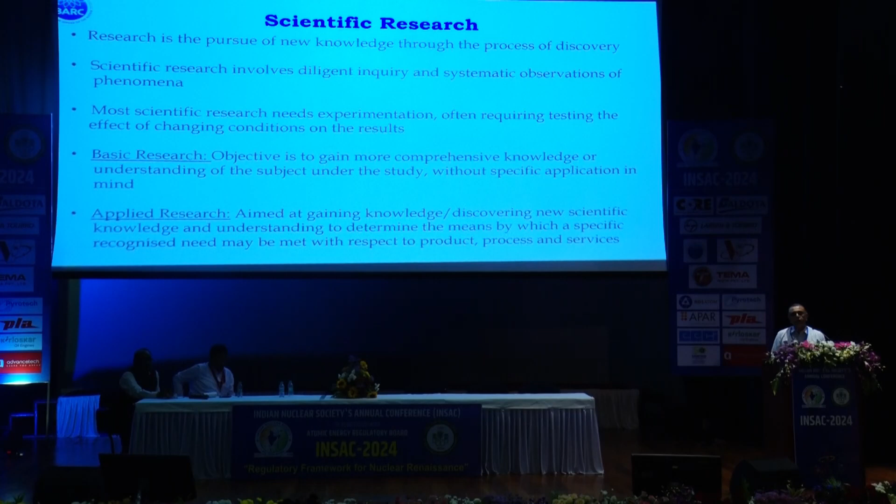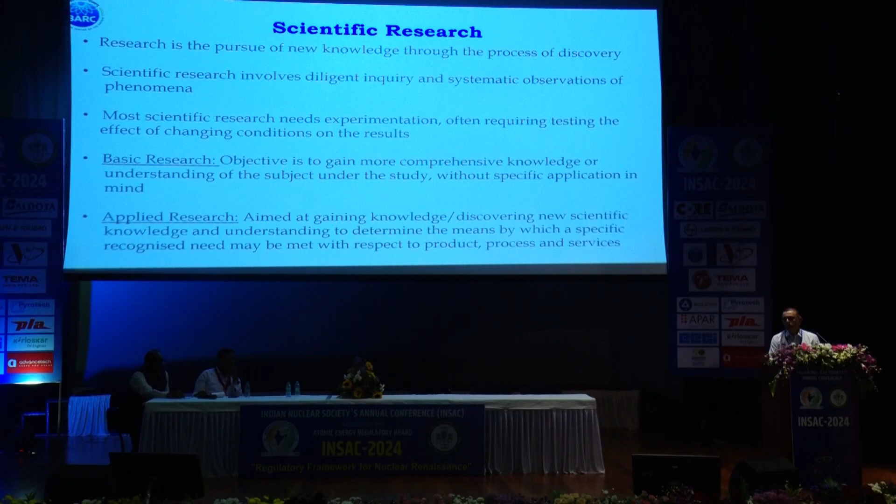Let me start with the basic definition of research, which is the purpose of generating new knowledge through the process of discovery. Scientific research involves diligent inquiry and systematic observation of phenomena. Most scientific research needs experimentation, often testing the effect of changing conditions on the results. And we see that there are two categories of research: one is basic research, and another is applied research.

The objective of basic research is to gain more comprehensive knowledge or understanding of the subject under study without specific applications in mind. For example, the study of spray. Basic researchers study spray with varied droplet sizes, interactions, etc. But applied research is very much industry oriented. The spray in a car wash or the spray in a nuclear containment would be entirely different; the characteristics would be entirely different. So with respect to the industry pursuit, the research gets oriented.

Now, in our nuclear domain, safety research is carried out between three agencies: the utilities, the regulator, and the research institutes. The primary objective of the utilities is to carry out research to meet the design requirements as per the regulatory guidelines. Whereas the regulators carry out research to set or review the design acceptance criteria, or set up new criteria so that the utility can meet those criteria.

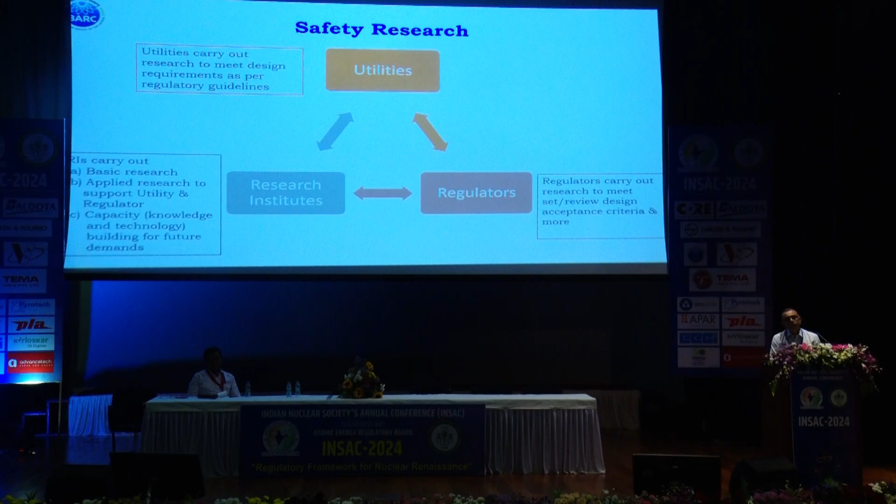Now the research institutes work on feedback either from the utility or from the regulator. Sometimes the utility requires some particular research to be carried out in the research institutes, or the regulator wants some research carried out there. So the research institutes carry out, first, basic research; then applied research to support either the utility or regulator or both; and third, capacity building, that is knowledge and technology building for future demands, since new research demands keep coming.

Particularly to focus here, why is regulatory research required? The research aims to close the identified gap areas in different fields of nuclear safety for fresh designs and aging plants. It aims to reduce the order of uncertainty in the selected safety and acceptance criteria, and to quantify the acceptance criteria rather than keep the criteria subjective.

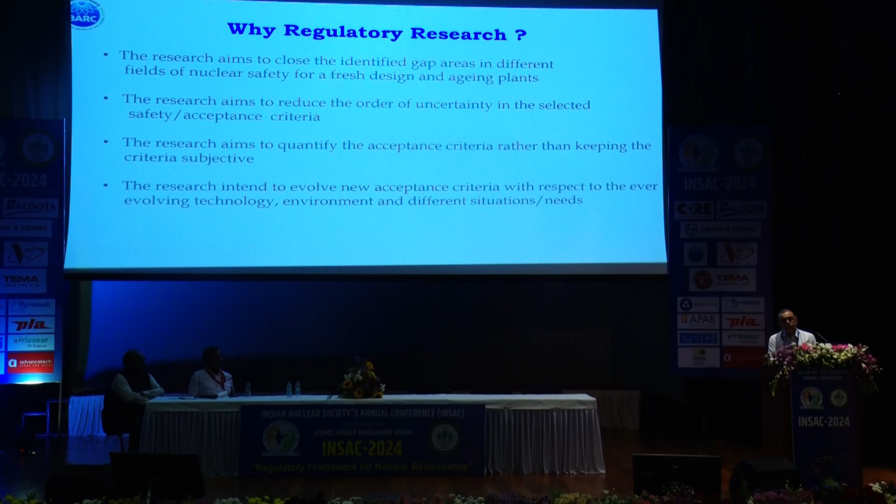In many places you will find the criteria are given subjectively, but a dispute comes whenever the criteria are put as a subjective matter. Then the research intends to evolve new acceptance criteria with respect to ever-evolving technology, environment, and different situational needs. As environment and situations change over time, there's always a need to update the acceptance criteria.

Now, I will show you some glimpses of safety research in regulatory decision making. The support given to the designers as well as the regulator over decades by the Reactor Design and Development Group is enormous. So I will just touch upon a few activities that helped the designers as well as the regulator in decision making.

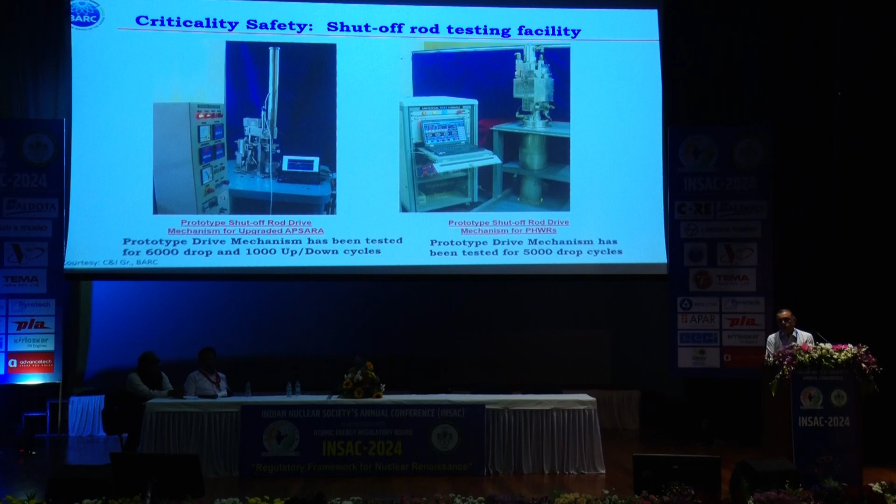This is with respect to criticality safety, the shut-off rod testing facilities. Two examples are given here: one is the prototype drive mechanisms for our Dhruva reactor and APSARA reactor, another is for the 500 megawatt PHWRs. The reliability of these systems is utmost required, and to meet certain reliability targets, all the design and experimentation are conducted in a repetitive manner. This is achieved at our Bhabha Atomic Research Centre.

This is the assessment of effectiveness of spray cooling on decay heat removal from coolant channel under postulated LOCA with unavailability of ECCS. This is fairly applicable for the old reactors, where under such postulations, as we know, the moderator gets dumped, and the spray cooling is the media which is supposed to remove the heat from the channels. So you can see this is especially,

this is a spray nozzle that is currently present in RAPS and MAPS. These are the central locations of the calandria, which sprays from the top, and it has basically 13 nozzles. And this is a hub in which the 13 nozzles are placed. And these are the spray nozzles which are kept near the end of the calandria, to cool the roll joints. So under circumstances like postulated LOCA with loss of ECCS conditions, how the channels are going to get cooled, that was one regulatory issue.

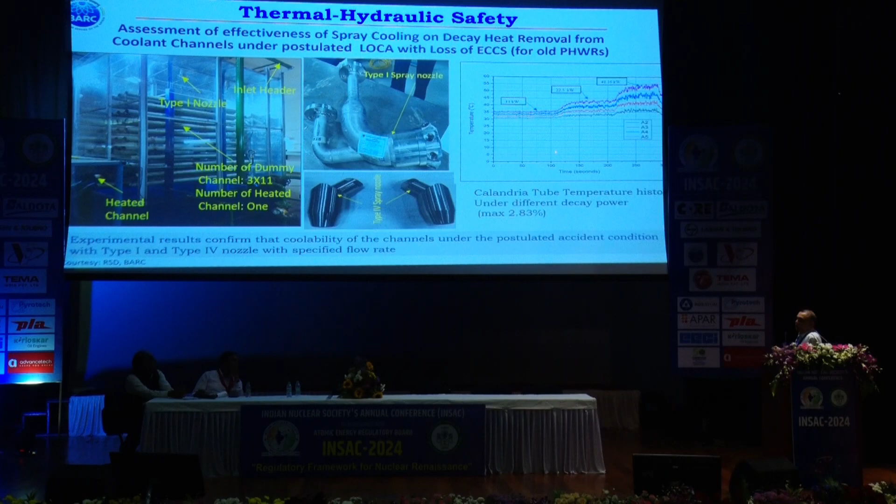So that was addressed through the experiments, and in the experiments, if you see, the channel is a heated channel simulating the PHWR channel, that is pressure tube, calandria tube, etc. So this is when it is subjected to some power. You can see the temperatures are stable. Stable means whatever is the injected power and whatever is the spray flow rate, the spray flow rate is able to take out the heat. So that shows the stabilization in the temperature.

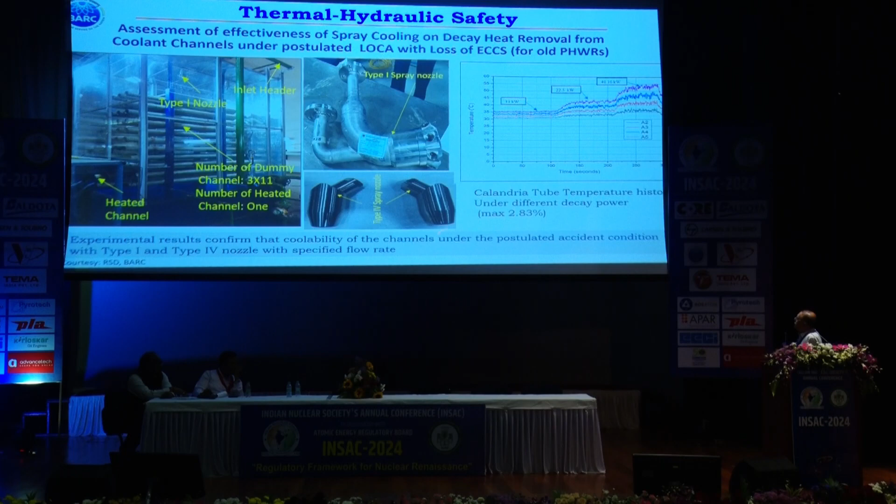Similarly, when the power is jacked up, you can see the stabilization of temperature. Again, when the power is jacked up, this is around 3% of the decay power, again the temperature is stabilized. So this shows that at different decay power levels, with this spray, it is able to take out the decay power. So this confirms that the channel is coolable under the postulated accident conditions.

Basically, today the ASME rule is based on the strength, and it is not based on the very frequent cycles of high magnitudes which are supposed to come during the earthquake. So rules were developed for improved integrity and safety assurance under the severe earthquake event.

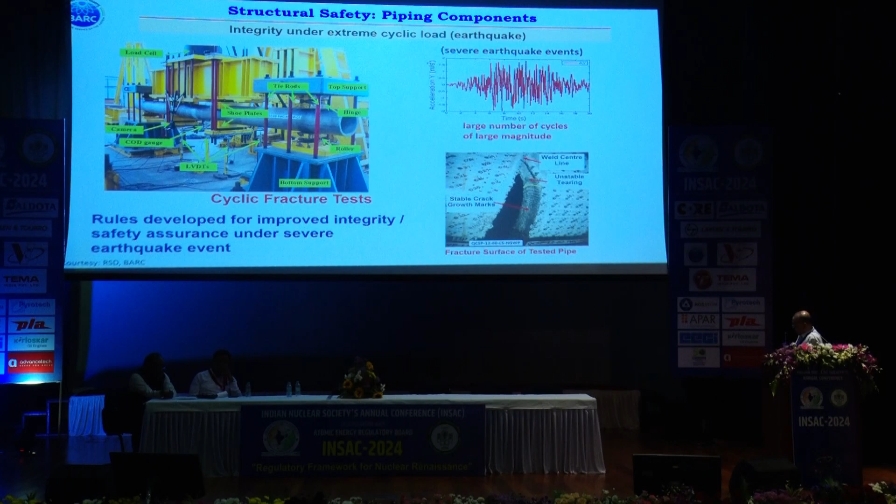Coming to the next one, this is the integrity under extreme cyclic loading, earthquake. So the rules are developed for improved assessment of ratcheting and fatigue. You can see that through-wall puncture has happened and then water is getting sprayed off. So this is also a situation where the rules need to be developed for an improved assessment.

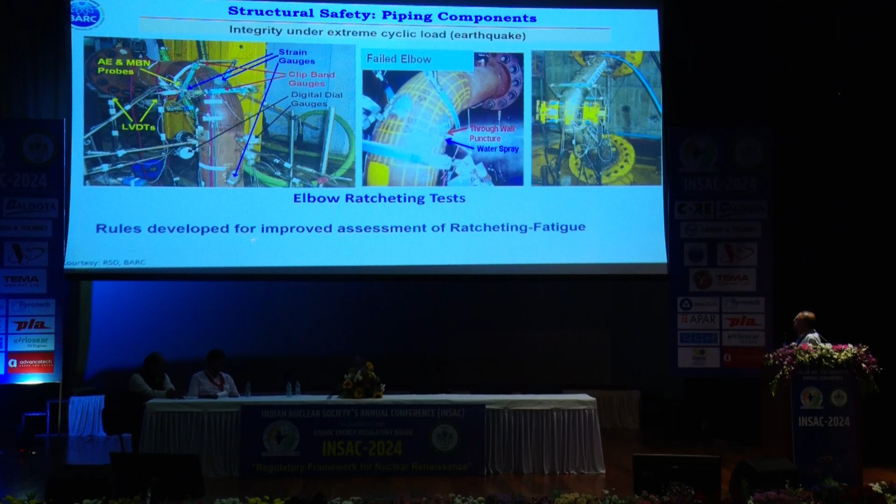Coming to another aspect, that is seismic safety. The soil amplification studies, basically with soil liquefaction. So this study is being attempted. You can see the shake table setup of soil laminar shear box. And here you can see the amplification factor versus height of soil column. At different columns, the acceleration is being measured. So this is the height of the column, and this is the amplification factor.

So it is concluded from this test that the soil column frequency was nearer to 7 Hz. Basically, this kind of information is required to generate the shear modulus and shear strain profiles or relations.

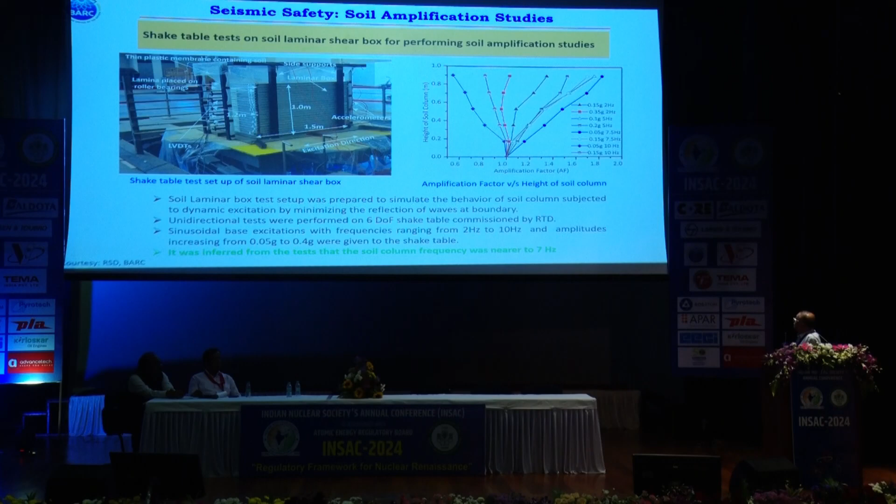This particular slide shows the development of a high temperature clad burst correlation. Our PIED colleagues developed this burst correlation with Indian PHWR clad tubes. So far, whatever is given in the SG-D6 guide follows the Erbacher relation. So you can see with the Indian clad tubes, the burst correlations at different alpha plus beta and beta regimes are widely varying. So this brings a need for establishing our own correlation.

So far, due to the lack of information generated at our end, we were always working with the PWR clad tube information. Now with the PHWR clad tubes, as the fabrication route differs, the grain orientations as well as the creep of these clad tubes are found to be widely different than the PWR clad tubes.

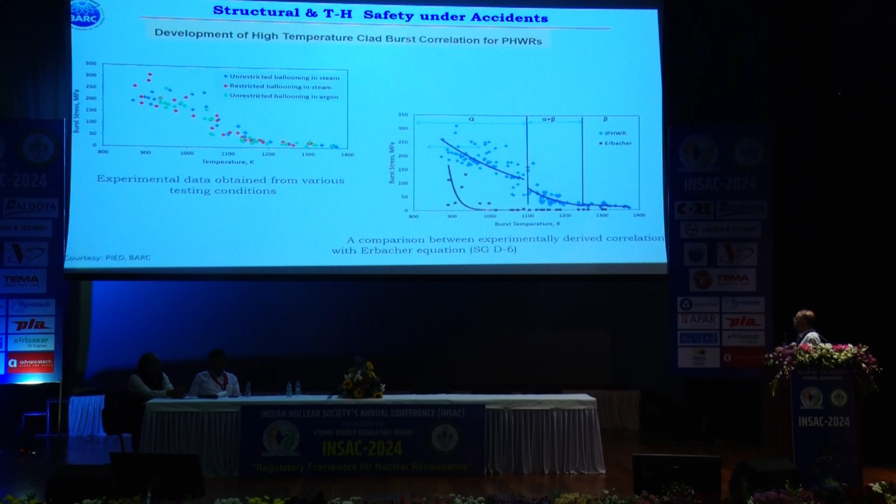This is a particular experiment that was done on PHWR channel integrity under LOCA with unavailability of ECCS. So far we were banking on the Canadian experimentation and the Canadian inference that the coolant channel survives under such postulated conditions, that is LOCA with unavailability of ECCS, and the moderator is able to take out the heat.

So we performed the experimentation for a full length coolant channel with the pressure tube, calandria tube, and with the internal weights that are equivalent to all 12 fuel bundle weights, so that the stiffness is well simulated. And you can see the contact, along with the garter springs, gets established at several locations, and once the PT contacts the CT, the temperature starts dropping, and finally the temperatures all get cooled down with the moderator as a heat sink.

And this is done at the 3% decay power level, which is expected at the time the LOCA with unavailability of ECCS situation arises. And this is another experiment. The same tube is now filled with 20 bar pressure, and the sagging at 3% decay power level is simulated. So you can see this large scale experimentation with a full length channel of 5.6 meters.

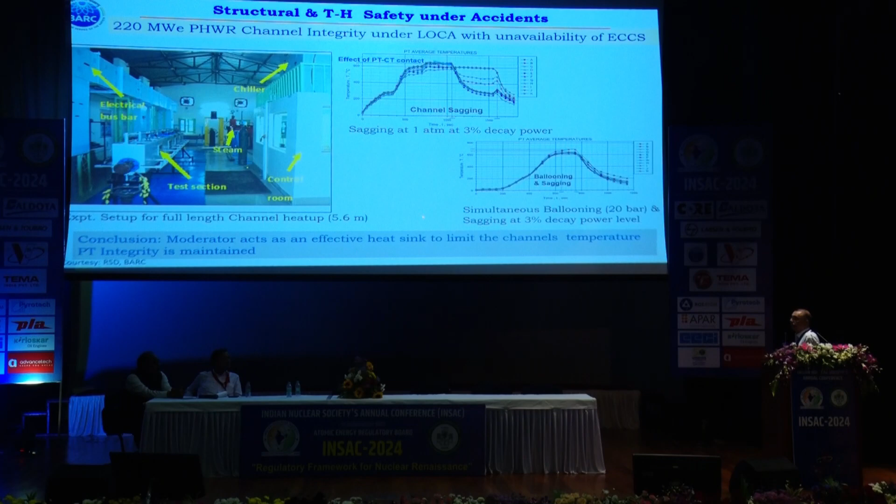Another gray area was there: subsequent to channel sag or channel balloon, the pressure tube contacts the calandria tube, and what would be the order of contact conductance. So the contact conductance was evaluated with a very precise experimentation, and you can see the pressure tube and calandria tube samples generated by our NFC colleagues. And this is the contact conductance that was established.

You can see the experimentation was done with contact pressures from 0.6 megapascals to around 6 megapascals. This range is responsible for when the pressure tube is sagging, and this is for the ballooning. When you have ballooning at high pressures, the contact pressures become very high. So this study is able to generate correlations with respect to the temperature and the contact pressure, as well as the material hardness.

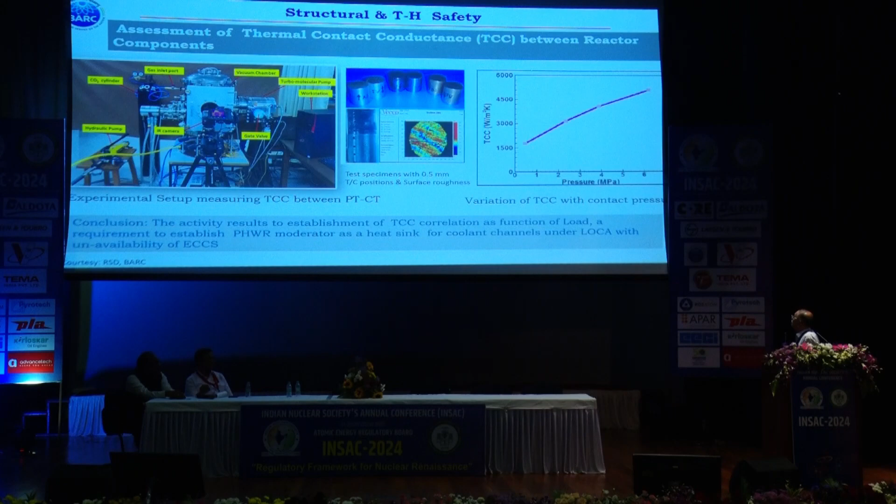This is another gray area which was prevailing for a long time, PHWR channel disassembly, when we are going to the situations where the moderator is boiling off, and this is an unmitigated severe accident scenario in PHWR. So when the channels are getting exposed, there's a concept of channel disassembly. The channel gets disassembled after a certain temperature and the strain rates which come due to the sagging.

So this is a pressure tube and calandria tube at 1:3 scale. Again, thanks to NFC colleagues who were able to make pressure tube and calandria tube of 1:3 scale. That means diameter and thickness are reduced by 1:3. Otherwise, the stiffness of the system cannot be maintained. So the experimentation was done, and you can see the temperature history as well as the deflection of the top row of channels.

So a disassembly criterion was evolved: it was observed that when pressure tube temperature attains 1,000 degrees centigrade with sufficient steam oxidation, the channel disassembles, and one disassembled piece is around 4 to 6 bundles length. So that gives a sufficient idea of how the channel disassembly takes place.

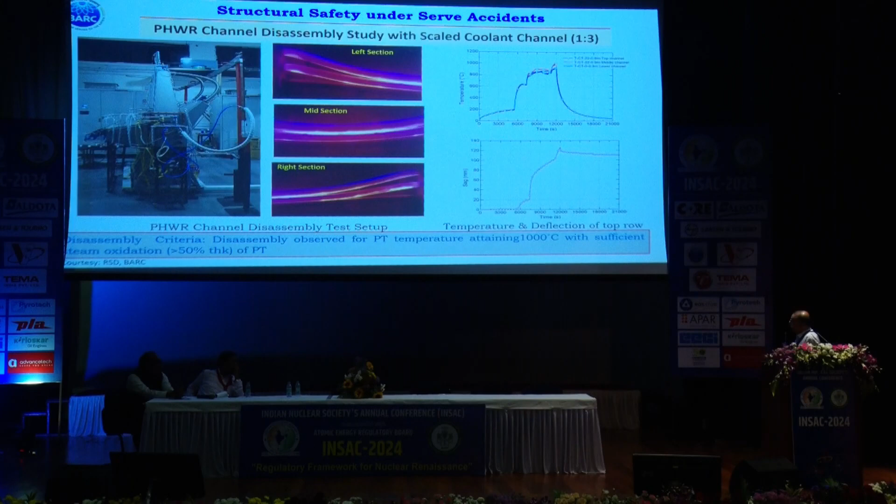Subsequent to this disassembly, there's a question of how much hydrogen generation is to be considered. This is very important from the hydrogen generation source term point of view, so that your recombiners are numbered and organized accordingly. So if you consider that the pieces of channels come down and are in the horizontal position, there's very little chance that steam will get ingressed and the internals of the channels will get oxidized.

So the experimentation was done. This is the channel simulator with all zircaloy material along with all spacers, so that the exact resistance of the flow path of the steam could be simulated, and the hydrogen generation with the radial power variations of the fuel pins.

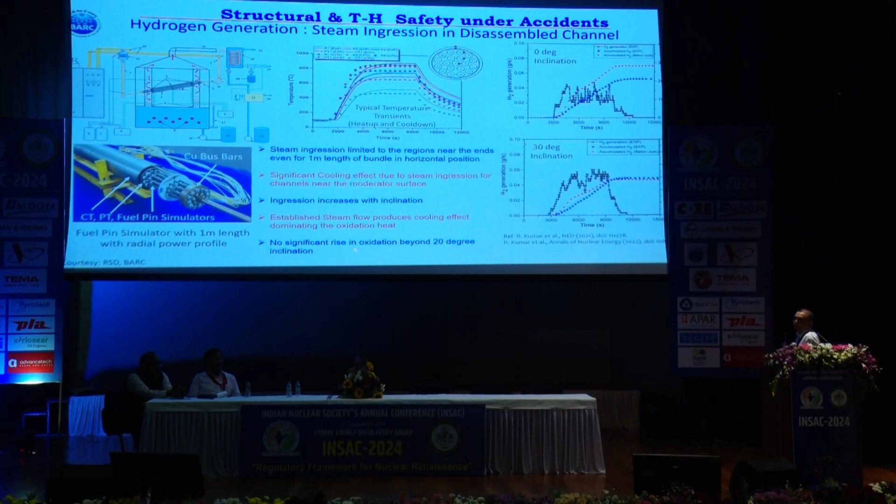Now you can see it is concluded that if you keep the channel in horizontal and tilt positions, in the tilt positions there is a larger steam flow. Of course, it is expected that hydrogen generation will be high, but nevertheless, the cooling is also there. So it is found that there is no significant rise in oxidation beyond 20-degree inclination. So this is also a very important observation.

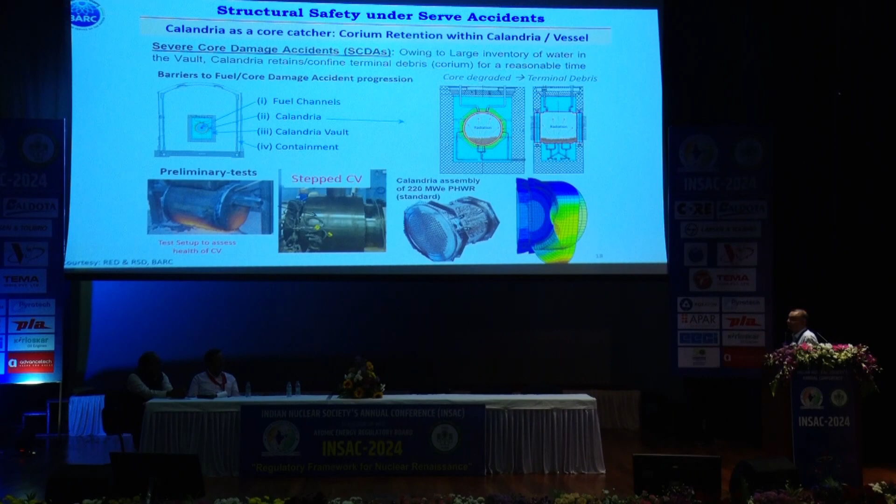How so quickly? How much? Oh, time flew. I will try to manage it.

So the containment safety is hydrogen studies. Recently this particular study has been done, that is the erosion of the helium layer. Today we know that the regulatory limitation is 10% volume by volume. So if you have the hydrogen along with the injection of air, after some time the hydrogen concentration comes down quite low, lower than the deflagration limit.

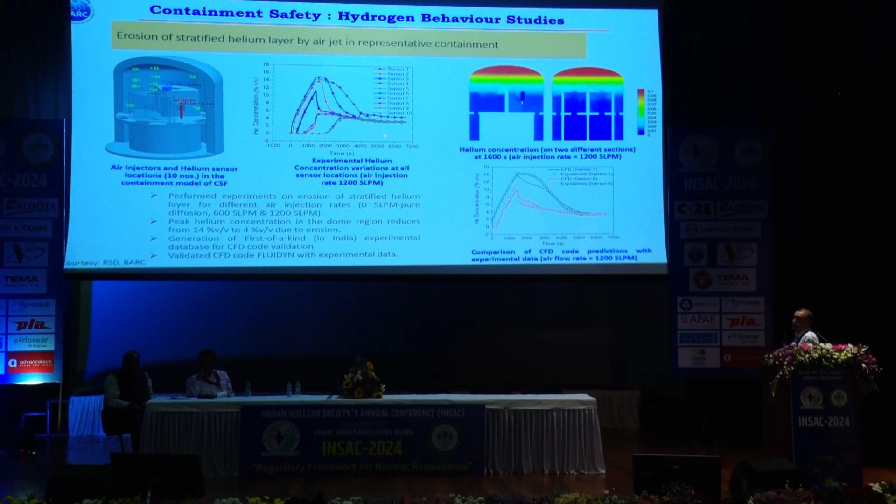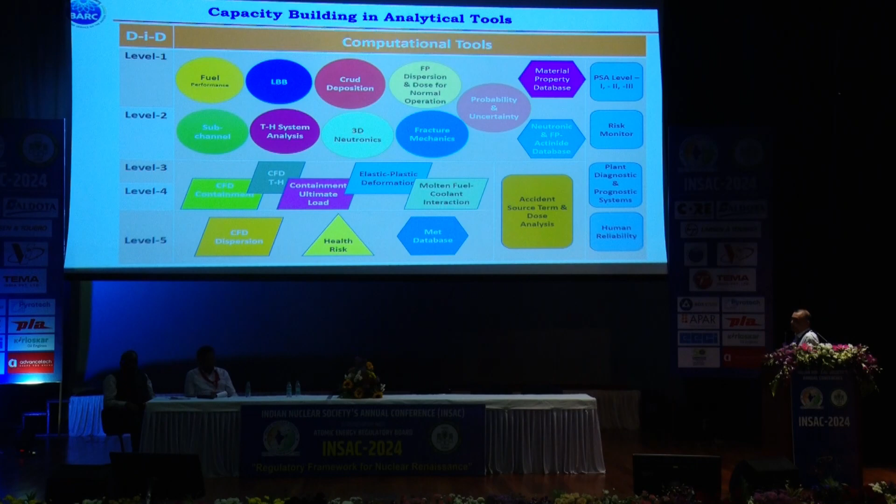Now with the capacity building at our center, we are having a series of design and analysis softwares which are evolving over the decades and which are still evolving. Reason is that due to the arrival of the new technology and the capacity of the high-end computing machines.

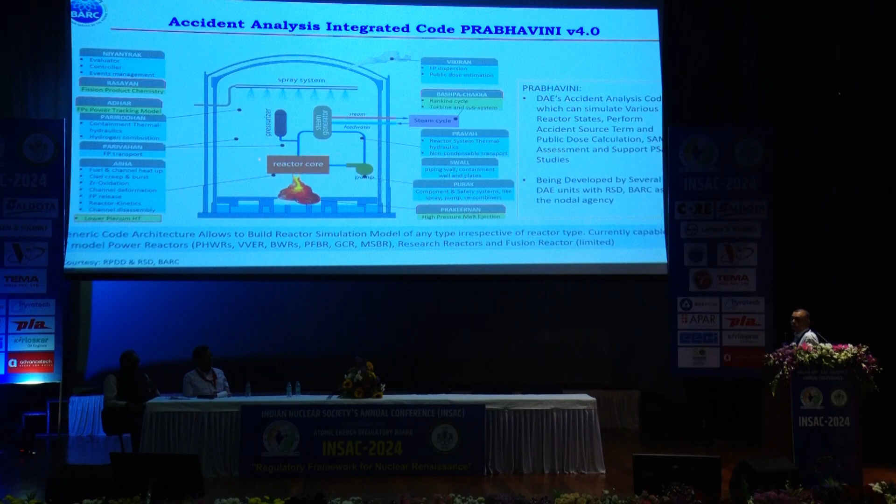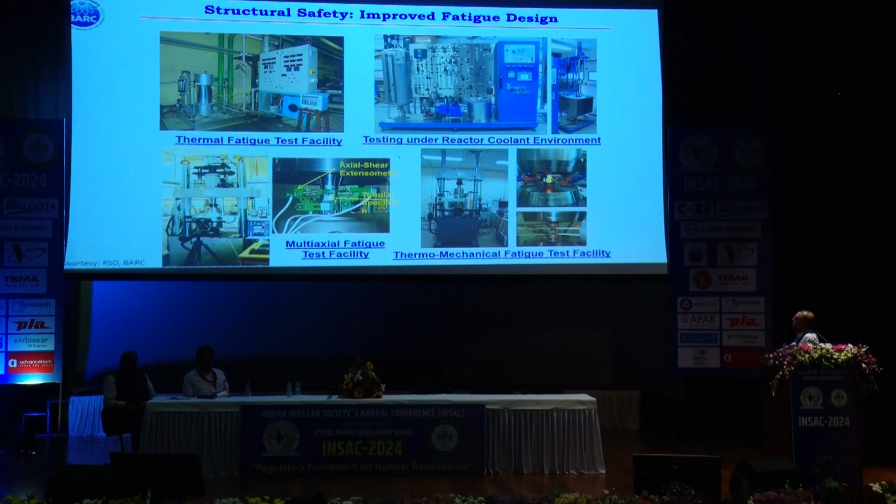And this is one of the latest generation accident analysis integrated code, which starts from the reactor accident initiation up to the public dose calculations, up to 7 days, 1 year, 3 year, 4 year, whatever is your wish. This is also the capacity of our reactor design development group, which is supporting over the years and decades. So I will just rush through the capabilities, rather the strength that has come over the years.

This is also very interesting now, the human reliability analysis studies, which is using the machine learning approach. So the human error probability is being estimated with the virtual environment. You can see the virtual environment. One operator is working and he is trying to put the firefighting injections, and virtually he could able to see all the fire that is coming towards him.

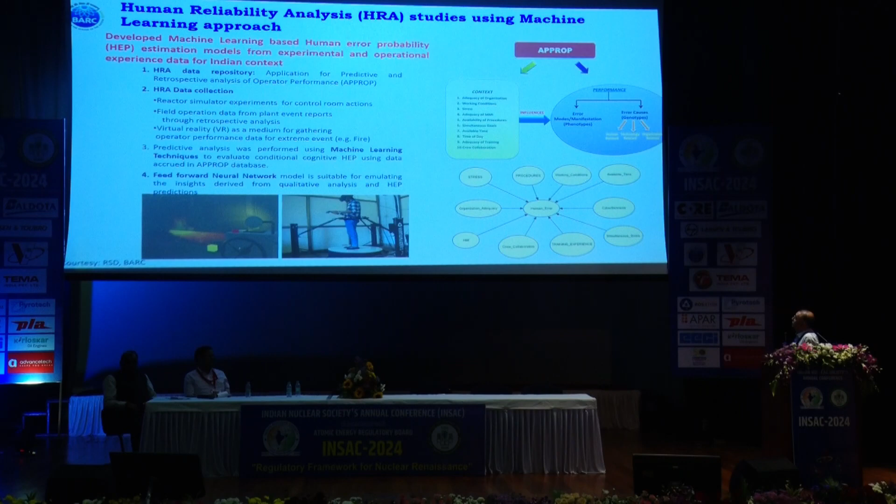So what kind of error that will be inculcating in his actions will come out from this study. So that the human error probability will be computed. The way forward, strengthening safety research.

Phenomena identification and ranking table. So this is very important to identify any phenomena that is going to get assessed. Now it may be based on the model, it may be based on the phenomena, it may be based on the model accuracy, it may be based on the information that is there. At BARC, only one such PIRT activity has been done so far. That was done in 2014, and that is purely done with respect to the severe accident progression of PHWR, since the order of uncertainty to determine the progression is very high.

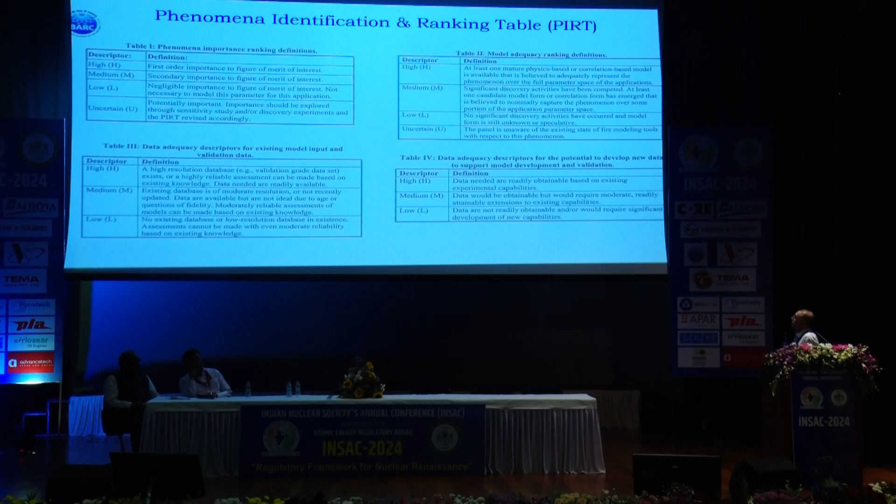So only one such activity is there, but unless and until we do such activity with respect to different cases, the order of funding in the research cannot be decided. All the research should not be done, only the most prioritized research to be done. So these are some identified research gaps that are accumulated with the AERB repository over the decades, I would say.

I've listed down some things, like say, for example, critical heat flux estimation for 37 element fuel bundle. Today we are operating 700 megawatt, 500 megawatt with the 37 element bundle, but we do not have any such correlations with us. And we are banking on some assumed correlations which are not at all validated. So this is one of the priority research.

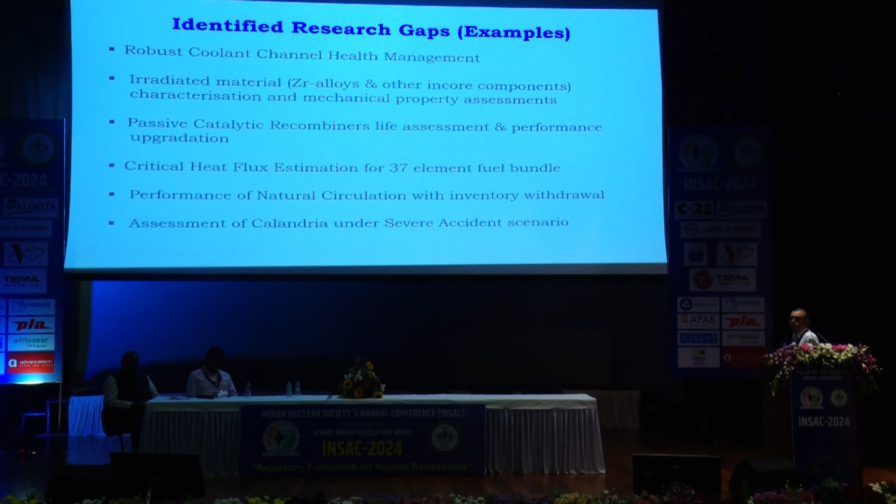Similarly, I would say this one, performance of natural circulation with inventory withdrawal. So if you have heavy leakage in the primary systems of any reactor, then the natural circulation becomes ineffective. No such systematic study has been done so far. So like that, they are with the repositories of AERB. I've just given the list.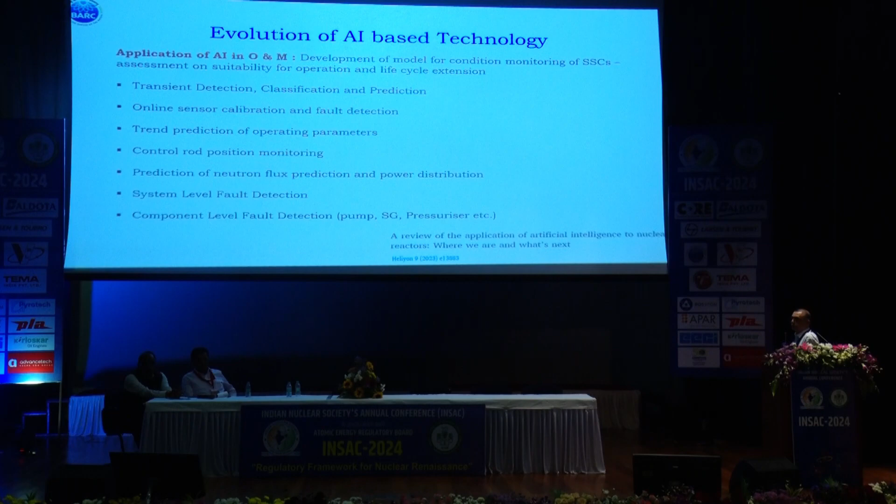Similarly, the AI gives a direction for the digital twin systems. So the digital twin architecture for fault diagnostic and prognostic has been found to be very effective. And currently, many industries, including Boeing, have also taken up the digital twin systems for their fault detection monitoring.